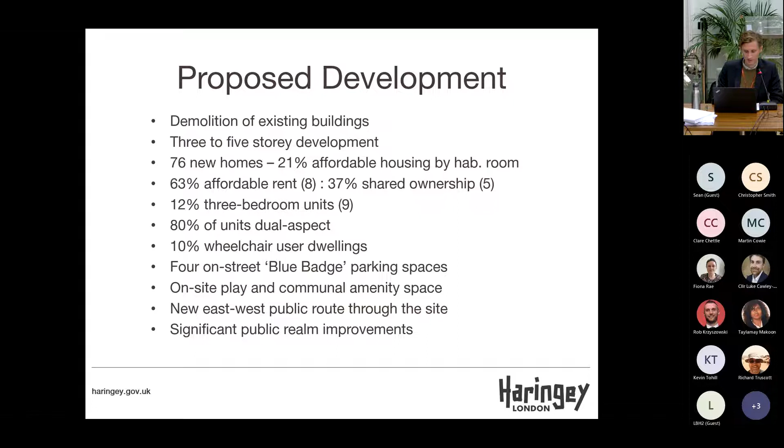There are 12% 3-bedroom units, 9 of the total. 80% of the units would be dual aspect, and 10% will be wheelchair user dwellings. There are 4 on-street blue badge parking spaces, on-site play and communal amenity space, a new east-west public route through the site, and significant public realm improvements.

The site is an angular plot of land located between the Roundway to the west and Church Lane to the east. It is a mostly vacant and derelict site that has been a visual blight in the local area for a long period of time.

The site has a fragmented land ownership, which increases the complexity of land assembly. The image on screen, with the coloured land parcels, shows this fragmented ownership. It is mostly surrounded by low-rise, non-residential properties, and residential properties in the wider area are generally 2 or 3 storeys in height. The area has a complex heritage context, described further on the next slide.

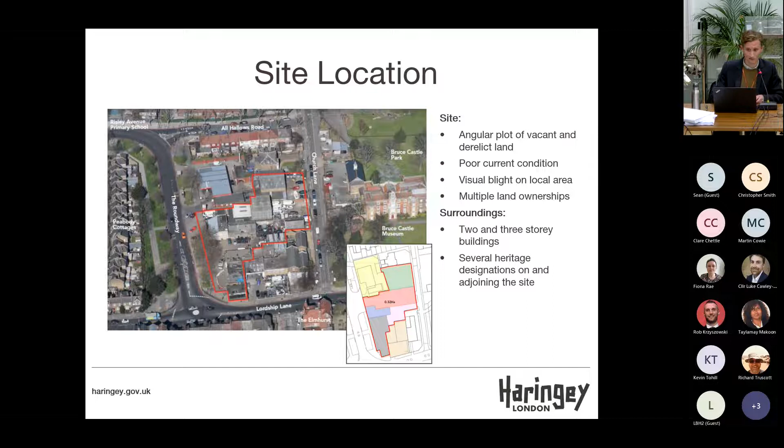An indicative master plan, shown in the inset image, has been submitted with the application, showing how the development will be incorporated into a comprehensive redevelopment proposal for the whole of site allocation SA63 in the future. As such, this development complies with the master planning requirements of policy DM55.

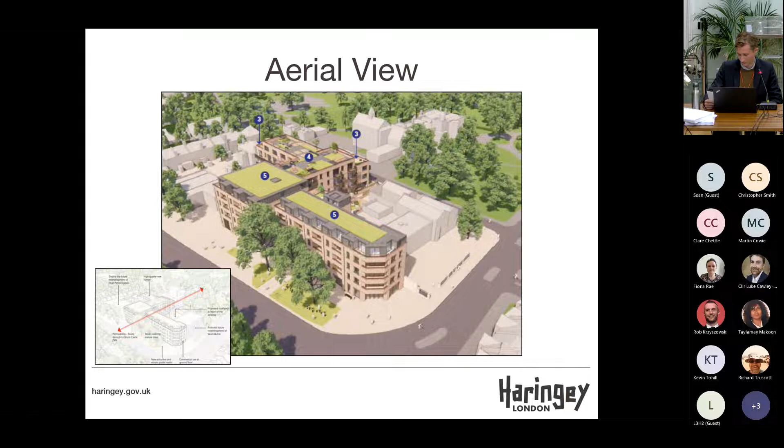The development would mitigate this impact through the use of brick and roof materials similar to those used within this conservation area. Outside of the winter months, any heritage impact would be mitigated further by leaf cover on the existing trees.

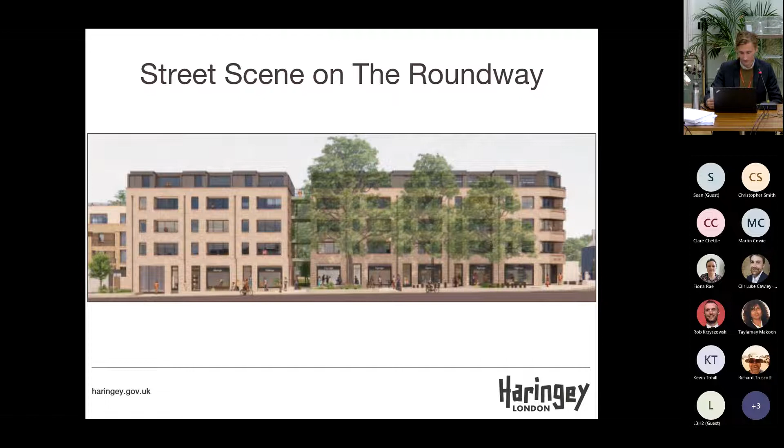This image shows the development street scene from the Roundway. The fire damaged and underutilised buildings and yard spaces would be replaced by a new building featuring elements of detailing influenced by the existing local built heritage.

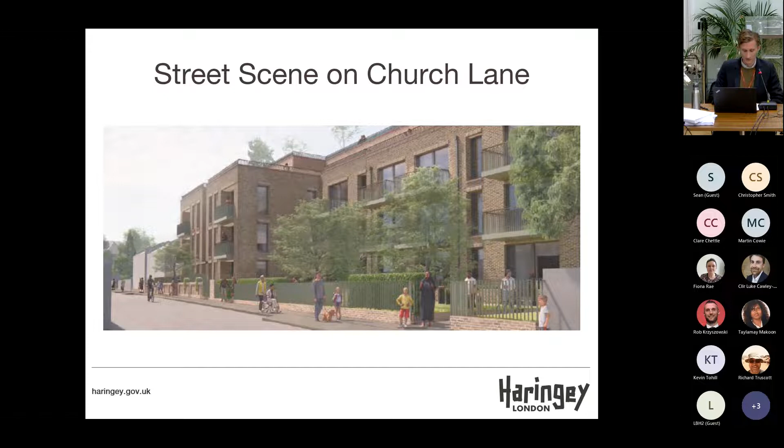The new building would increase natural surveillance over Church Lane and would provide a significantly greener street frontage.

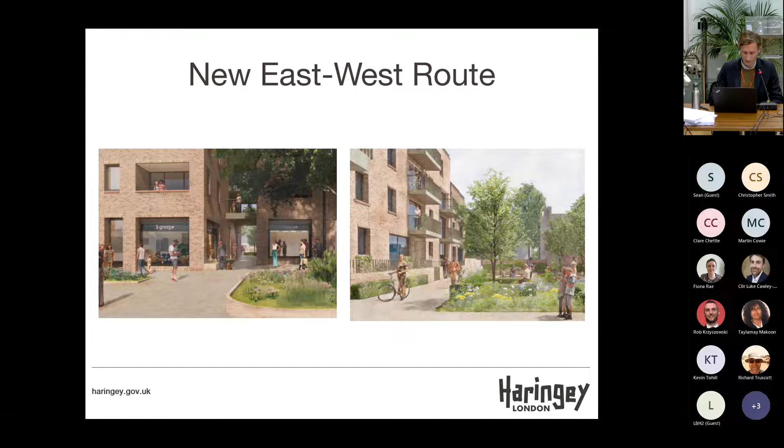This image shows the new east-west route that would connect the Roundway and Church Lane, increasing access to Bruce Castle Museum and Park for local residents.

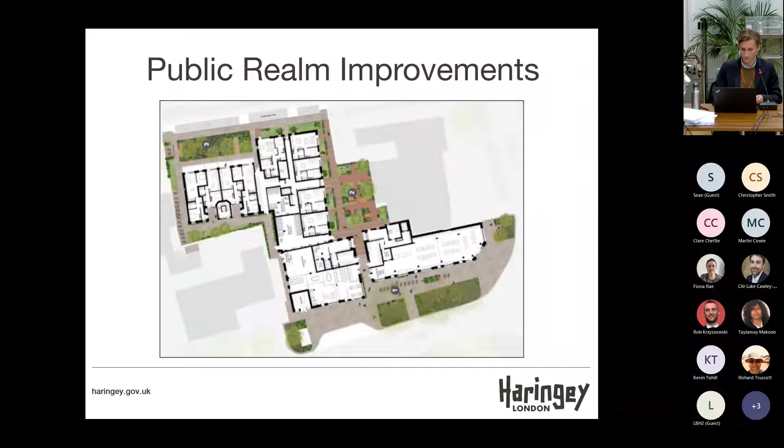The development would provide a significant uplift in urban greening compared to the existing site. It would include several planted communal amenity areas, which would be accessible for all residents. The car parking for the development would be provided on Church Lane. The development would not negatively impact local cycle infrastructure.

So to summarise, this development proposal provides a mixed-use residential and commercial redevelopment on the site, which is in accordance with site allocation SA63. It provides Class E retail and F1 non-residential institution uses, which provide improved employment space and an uplift in jobs.

There's a high-quality design with the quality review panel stating that there was much to admire in the proposed design, including the scale and massing and the brick materiality of the scheme, and also that careful thought has been given to the landscape design.

The design has evolved further since the panel's comments, and there is support for the scheme from the council's design officer.

In terms of heritage impact, the scale and height has been minimised through pre-application discussions. No objections have been received from Historic England.

The Conservation Officer finds a moderate level of less than substantial harm to the significance of local heritage assets. Paragraph 202 of the NPPF states that where there is less than substantial harm, this should be weighed against the public benefits of the proposal.

The development will provide substantial public benefits, including new housing and affordable housing, renewed employment space, a new route through the site, and optimised development on a vacant and derelict site. As such, the development is acceptable and balanced in terms of its heritage impact.

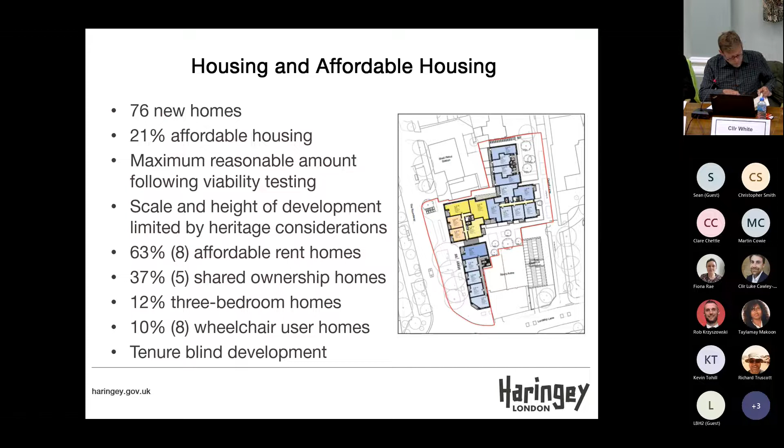Okay, Councillor White, okay, you've got a second question which was on highway safety. Do you want to ask that one? Yes, thank you. So in the original report that was circulated to us last week, the transportation officer submitted an objection on a number of grounds, one of which was detrimental impact on cycling infrastructure, and it talks of serious highway safety issues caused to cyclists.

Now we've got the addendum today where the transportation officer still objects on other grounds, but on the danger posed to cyclists, it now states there is a neutral effect on the cycle and pedestrian facility, which seems quite a significant change from what appeared in the original report. I'd like some clarification on why there's been a change from what seems to be a claim of significant detrimental impact to cyclists to a neutral effect. How has that change in opinion come about, please?

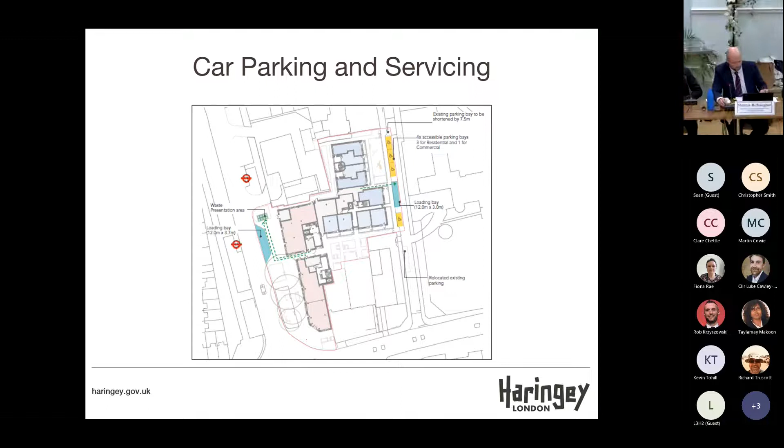Chair, if I may, at this point it'd be good to bring in Maurice from the transport team just to explain the further information he's received since the publication of the report that's led him to that change in conclusion.

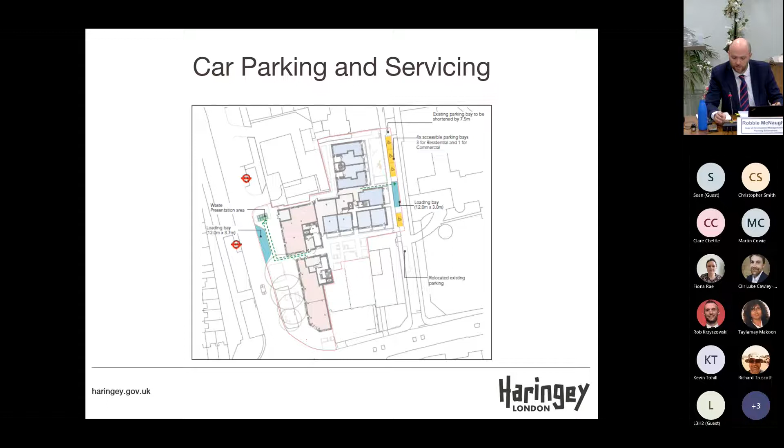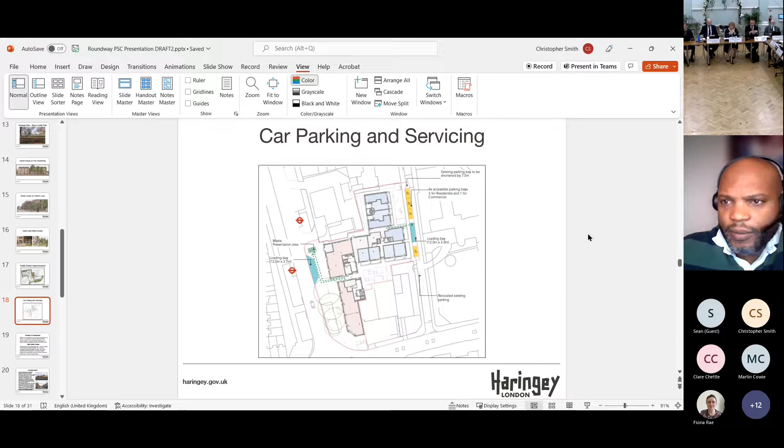Good afternoon, Chair. Maurice Richards, Transport Planning Team Manager. Councillor, and Chair, it's fair to say that we still need a detailed scheme to be designed up and a stage 1 and stage 2 road safety audit undertaken as part of the Section 278 agreement.

What the applicant has done since we provided those comments, they've gone away and looked at the scheme and the design of the scheme in line with LTN 1/20 and the London Cycle Design Standard, and proposed a few changes. We're comfortable that now it's a neutral impact, in that there is a residual carriageway similar to what exists on site.

However, we'll be looking, as part of the Section 278 agreement which is attached as an obligation to this application, to look at an enhancement rather than a neutral effect. But currently, as it stands, I can confirm it's neutral, and we'll look as part of the 278 to see how we can enhance the existing facility.

Thank you, Maurice. So, Councillor Over. Thank you, Chair. I've got four points to raise, I'll be as brief as possible. Points of clarification, just questions that I need to ask the officers.

The first one's on the impact of heritage assets. At page 127, under site requirement point 4, it states a development on the site should enhance the setting of Bruce Castle. However, under the Conservation Officer's comments at page 191, it is noted there will be an impact on the nearby heritage assets, with wording such as visually intrusive and overbearing developments, and that it misses the opportunity to enhance the area. So how will this development meet this site requirement of enhancing heritage assets when it will have an impact? That's the first question.

I'm David Lee, Major Projects Project Manager for this scheme. I'm Trevor Halls, Director of Architecture at Ingleton Wood, a multidisciplinary design company. And I'm Emily Snelling, Supported Accommodation Development Lead for Haringey.

So, get a full page. There you go.

Okay, so Tanya has given you a brief explanation of this scheme. We've been working together with Haringey and the Planning Department for probably over 9 or 10 months now to get this scheme to the stage that it's at. You can ask Emily various questions about the co-design steering group and the reasons behind the scheme, so I'll brush over those.

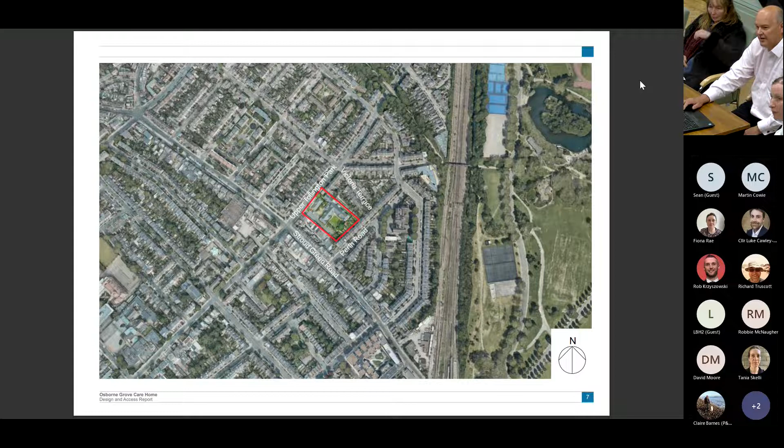Tanya's described where the site is. It fronts onto Upper Tollington Park, which is a secondary road off of Stroud Green Road Junction. Stroud Green Road itself frontage isn't in the conservation area, but the Upper Tollington Park, Victoria Terrace and Perth Road sites are all within the conservation area. So we overlook those 3 frontages.

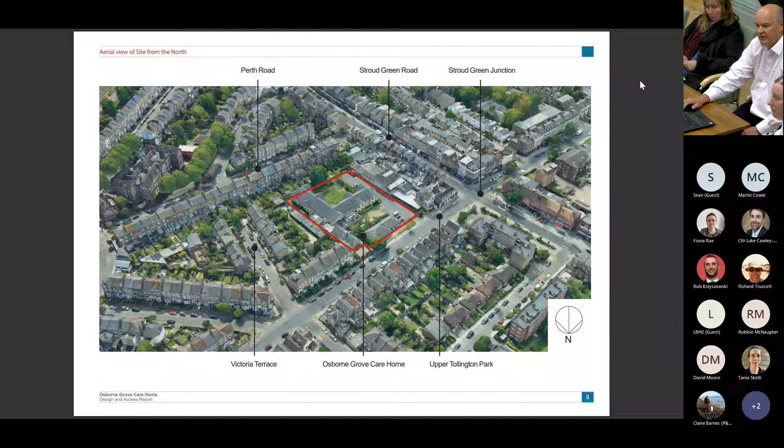You can see some aerial views of the site. There is an existing care home on the site, which you can see. It's a 2-storey development with a very steep pitched roof, and at the front of the site there's a clinic. You can see that from various directions, and that gives various views.

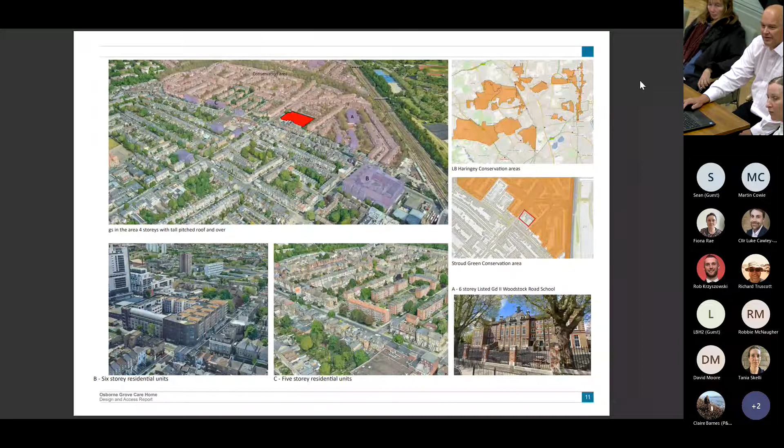I won't go through those now, they're all in the design and access statement that's been prepared. You can see the conservation area in pink at the top of the aerial view, with the site highlighted in red.

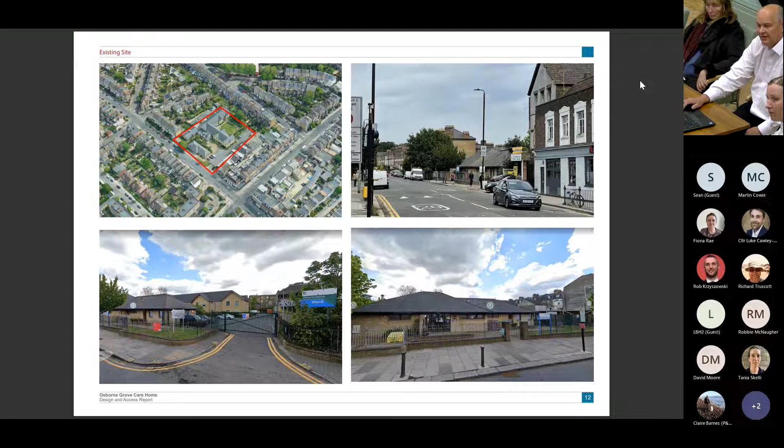This has got various views into the site. The existing site has an entrance at the Stroud Green Road end of the site, and you'll see in the scheme that we've maintained that entrance through there.

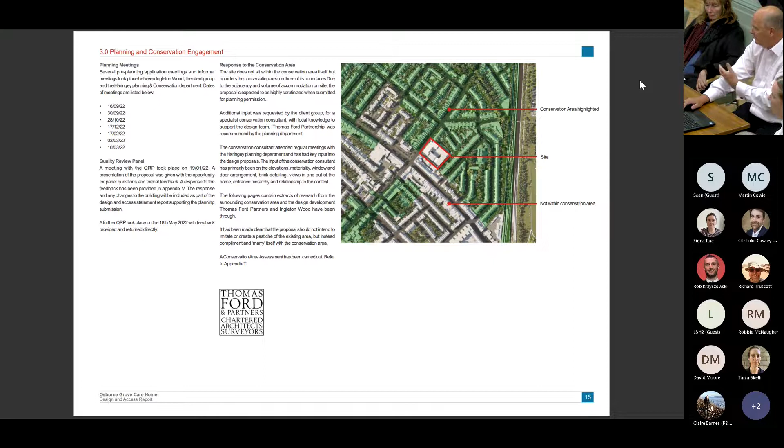These are all surrounding conservation areas. We've consulted with the planning department and the conservation officer at length throughout this process. We've probably had up to 15 to 20 pre-application discussions. As Tania said, it's been to a QRP panel twice, and we've got the feedback from all of those. We have a heritage and conservation architect in our team as part of that, and there's been ongoing discussions between everybody, and you'll see that reflected in the quality of the design.

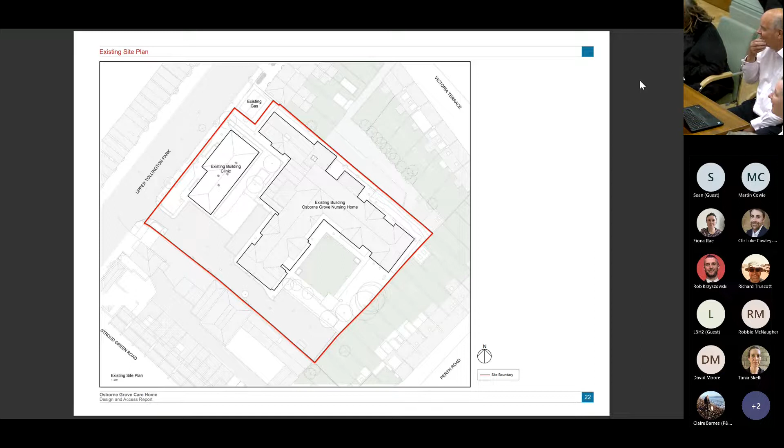Okay, we're back. So can you remember what you... I think so, yeah. Okay, that gave you a brief history of the consultation and all the stakeholder engagement that we've been through on the project. It's been quite intense.

I'll just run through the scheme now. This is the existing site plan. You can see the care home itself and the clinic at the front. It's important to note that at the top of the site there is a gas governor, right on the north corner.

That gas governor is owned by Cadent. It doesn't impact on the site at all. It doesn't feed gas to the site, but it does look after the rest of the district. We would have liked to have lost it off the site so we could have continued the terrace all the way along, but unfortunately that's had to be contained, and we've tried to incorporate it within the design as much as possible.

You'll see that the main entrance into the site, a vehicle entrance through to the parking and delivery access, is to the west part of the site, facing onto Upper Tollington Park, and the entrance to the existing care home is through a gateway at this end, and it comes through.

You'll see on the site also that there are 3 trees at the back of the site here on the boundary line. They are category 3 sycamore trees. They really are not good quality and in need of a lot of maintenance.

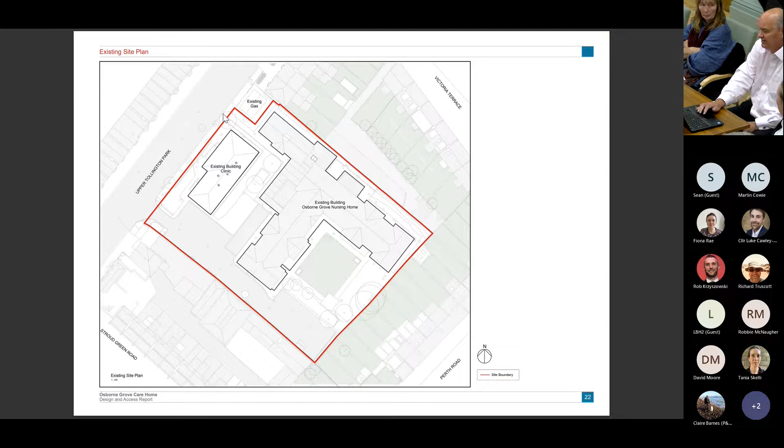We are proposing to remove those trees. The rest on the site are ornamental trees, so we're quite easily removing those. The one tree on the frontage of the site is a maple tree. It's a category 2 tree, but it's right on the boundary, and it's currently impacting the pavement and the boundary walls. On our future scheme, it actually impacts right on the main entrance of the scheme. So our proposal has been to remove these trees and plant a lot more to mitigate that.

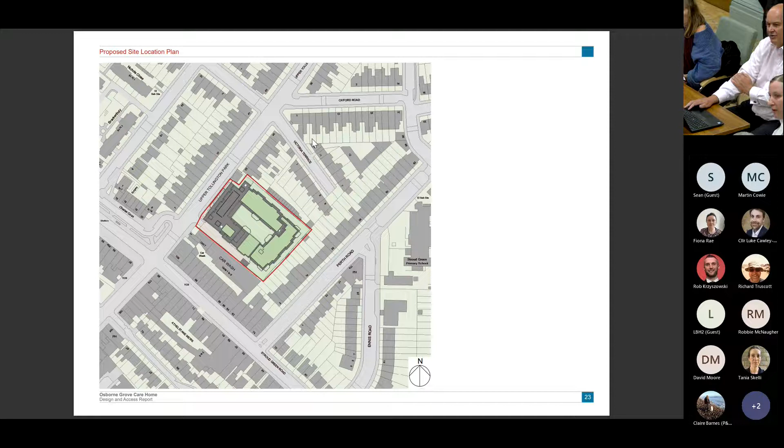This is a site location plan, so you can see how the new care home fits into the site, with that north corner wrapping around the gas governor.

I'll zoom in on that site plan. You can see the proposal is to maintain the vehicular access at this end, and the new trees all around the edges of the site. It's, let's call it, a donut-shaped building with a central courtyard, and that is for the safety, security, and dignity of the residents of the home, to enable them to get outside.

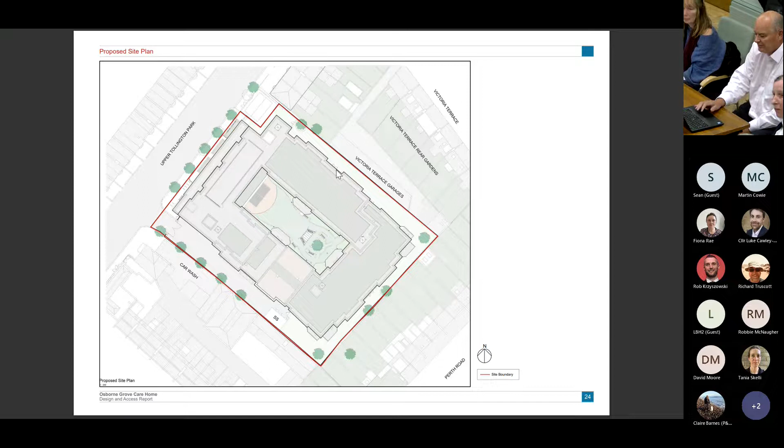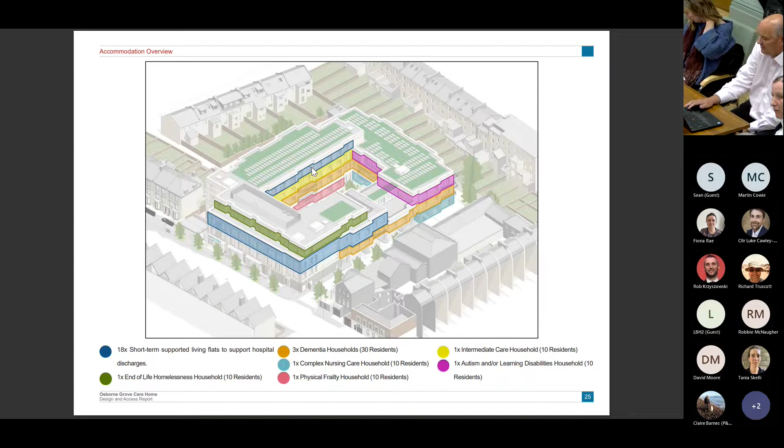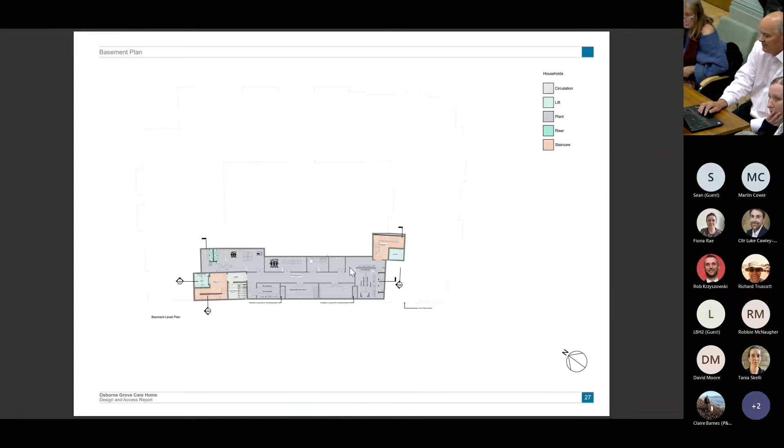There are ground source heat pumps all in the courtyard area, and they access into the back of that plant area. Above that, on the first floor, there are 3 households. I'll explain the households later. This is very much the servicing area.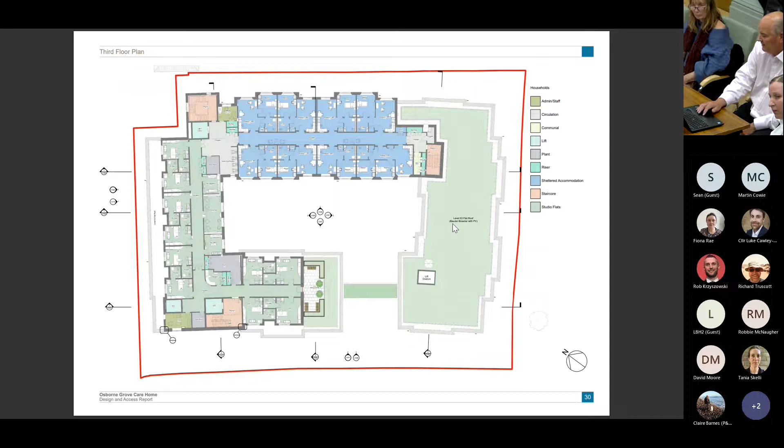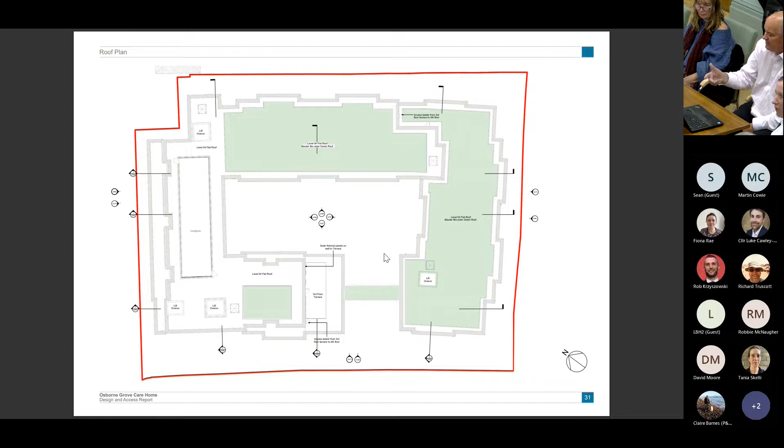That's the 3-storey element along the back, with roof space around there, more sheltered housing, and then these are the end-of-life homeless flats. They've got their own lift and entrance from the ground floor, so they can access their floor separately on an individual basis. Each of the roofs are bio-solar roofs, so it's green roofs throughout with PVs on top as well, giving us biodiversity, rain attenuation on the roof, and power generation.

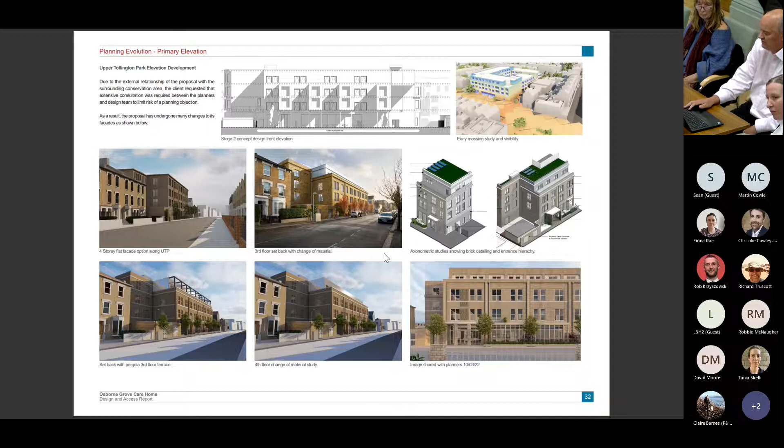We've been through many iterations on how the elevational treatment of this would complement the conservation area, and you can see we had a 4-storey frontage. We've been through all sorts of different methods, worked very closely with Elisabetta, and now we have a 3-storey solution to the front with a setback roof. It's all brickwork, and it's all intended to be off-site construction.

It's been exquisitely detailed, if you like, in consultation, with pilasters and dentil courses, and window proportions all worked out, with brickwork detailing and soldier courses going around the building, carrying on all the way around. You can see the gas governor at the front here.

That has been dressed around in a similar manner to the main building, so that at the moment it's just a close-boarded timber fence around it. It looks a right mess, so we've tried to incorporate that into the design.

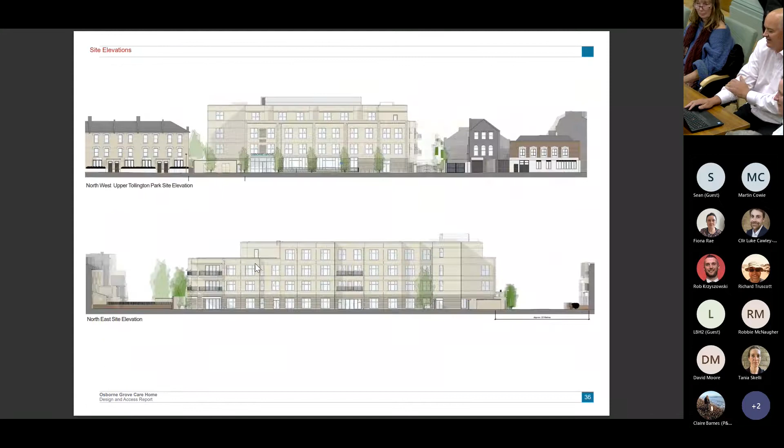I can emphasise the details. You've got elevational plans and elevations, interior quality. I was going to explain the households as well, because it's intrinsic to the design how these households work, the supervision and surveillance of the residents, and they don't have to move more than 8 metres to get from their bedroom door into that central area. That's key to the design, and I was going to go through all the elements of how it's got to that.

Sustainability is the most important part to just finalise on: off-site construction, detail in the fabric, high insulation, ground source heat pumps, air source heat pumps, and PV. We'd like to get to a zero carbon solution and would love to have achieved that, but this building has to be maintained at 25 degrees, 365 days of the year, so we are using the thermal mass of the building to control that temperature. We are 69% above building regs requirements at this present time, so it's done its best to get as far as we can push it, given the amount of roof space we've got to put PVs on and that sort of thing.

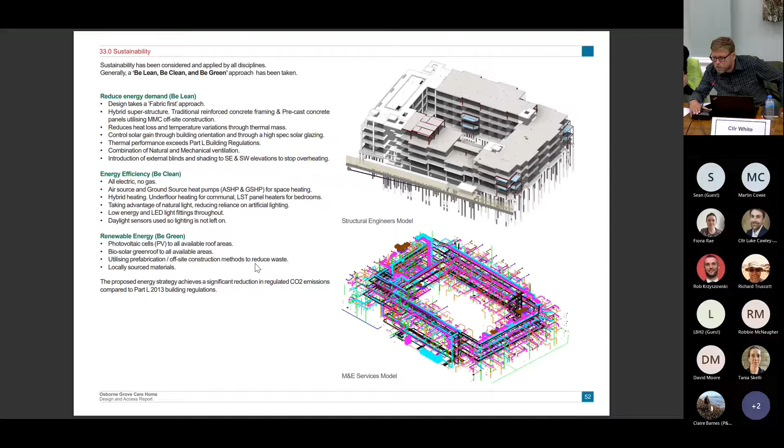Councillor White, go on. Yeah, thanks. Mine was just very quick. You didn't have time to tell us about the household situation, so maybe you could tell us a little bit about that now.

Go on, Clive. So essentially we've created the home around a lot of studies into good quality care homes. We've looked at the sizes of different households, and the optimum number is between 8 and 12 beds per household. So we've got 10, right in the middle of that number.

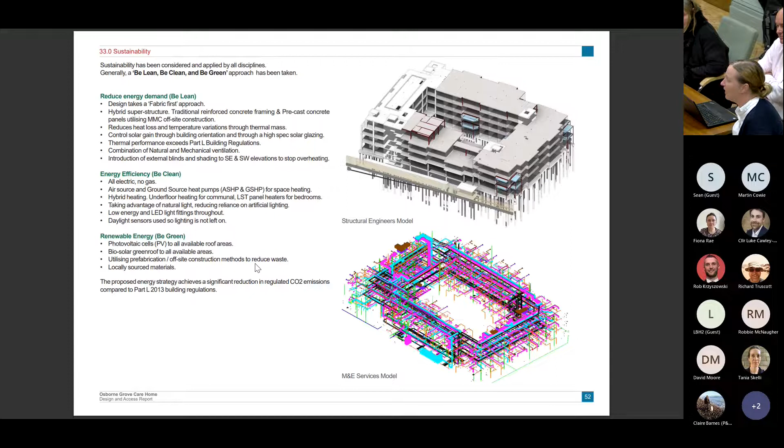What we've done, if Trevor can bring it up, is we've sited the communal facilities, so lounges and dining rooms, at the centre of those households, which means that if you're in one of the bedrooms furthest away from those communal areas, they are actually only 8 metres away. So if you're fairly mobile, not in a wheelchair, it actually encourages independence and movement if the areas you have to walk are fairly short.

You can't really see it well in these images, but the angles of the corridors are splayed, which improves vision for nursing staff. This nursing pod is located right in that central area, and nurses will have lines of sight all the way down. In terms of reducing the risk of falls when people come out of their bedrooms at night disorientated, we're really trying to minimise those safeguarding risks.

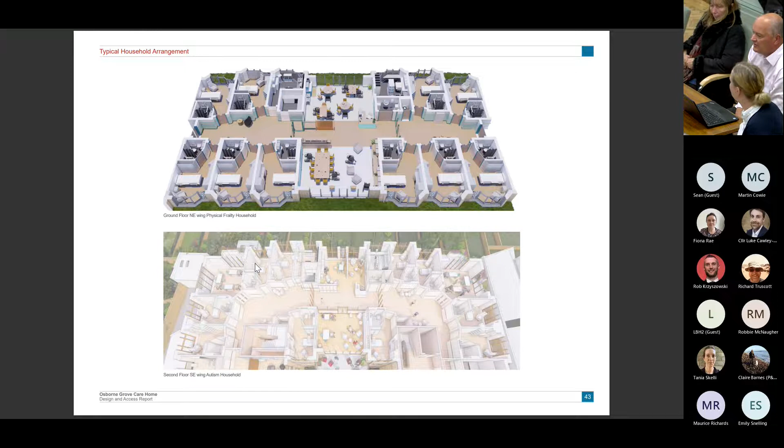They also call it passive design, in terms of dementia-friendly design. Generally, if you're somebody with dementia, you'll come out of your bedroom and head towards the bits of the corridor where it goes wider, because that gives the sense you're heading somewhere important. On the dementia side, we've collaborated closely with the University of Stirling in their DSDC unit, who will audit this scheme, but have already audited the design in advance and have been very supportive and accepting of it. So that's very positive for us.

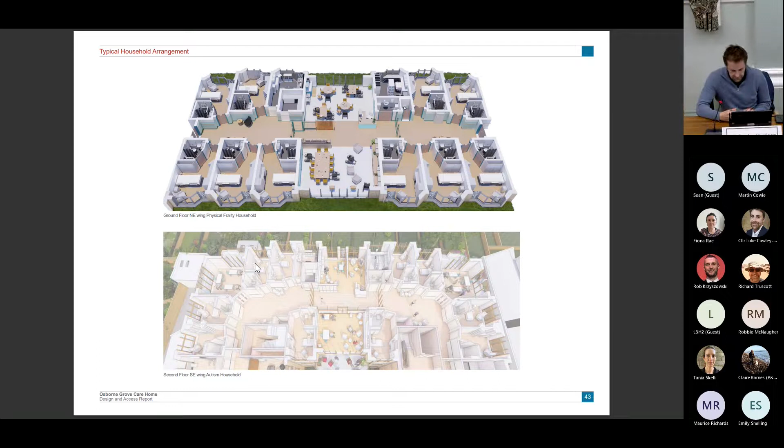Thank you. Councillor Cawley-Harrison. Thanks, Chair. Four points. First, on the design, I do find it a bit flat, I have to say, but at the same time quite imposing. It's so close to the pavement, it's ahead of the line of all the terraces. So I'm wondering why you haven't continued that line rather than bringing it forward and making it so imposing, because it's a big building width-wise, and why you haven't introduced the simplicity of the other buildings on the street.

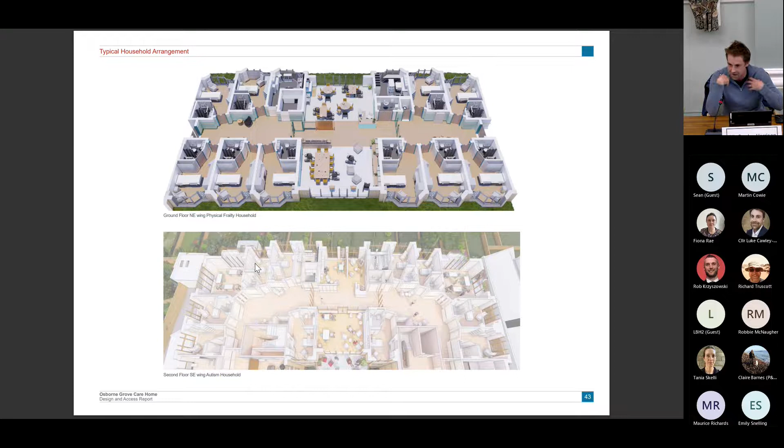Simplicity, but obviously the beautiful design of them as well, and the contrast and all that sort of thing. It feels like, I know you talked about detailing, but for me it feels flat, and a lot of that is missing. Perhaps a more blended design might feel a little bit less oppressive.

That's point one. Second, I don't know a lot about these sorts of facilities, but there's obviously a real mix of different needs going into this one building. Is that commonplace? Is there a conflict at all? Would that be fairly normal?

Third point, it feels like there's going to be quite a lot of residents. I can't remember the exact number. Is the courtyard space in the middle for all of them, and what sense of space can they each expect? Will there be times they're allowed out, or can anyone go out at any point?

And then the fourth point, Osborne Grove isn't that old. The current site isn't that old, but you said it's at end of life, which is concerning. I guess you mean end of life for the use of today. How do we know this is being future-proofed? Because I'm sure when Osborne Grove went in, they thought this was a long-term solution. So perhaps a little background on that would be useful.

Thanks. I can refer you to the Cabinet decision in 2019, which goes into a lot of detail about why we wouldn't keep the existing building. Primarily, the building was never designed to be a nursing home. It was designed to be a residential respite facility for people with dementia, so it was only ever meant for short-term stays. There's a lot of fundamentals in the building that just aren't quite right.

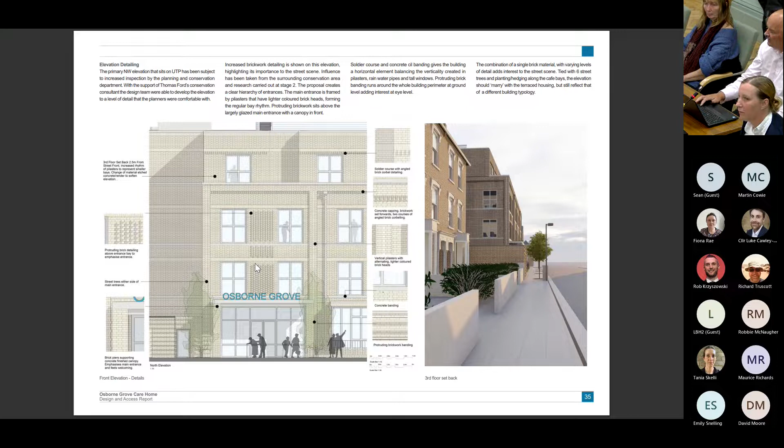Okay, thank you. You can see the proportions - they very much match the rhythm of the street scene. So the bays, the 8-meter bays, are typical of the width of a terraced house down the street scene as well.

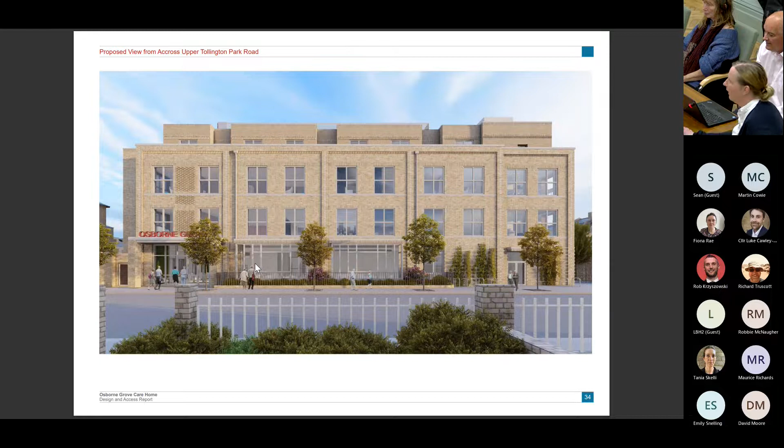Okay, and there's outside space and resident mix. So in terms of resident mix, generally most care homes we're using are in the private sector, so they have to maximise bed spaces, which we will be aiming to do. But within this provision we've tried to ensure we've got provision for placements we're unable to make. Where we've talked about specific dementias, at the moment we're placing residents as far afield as Croydon for specialist dementia - not your Alzheimer's but Korsakoff syndromes and more complex dementias. It may be that over time you get more of a blend of people, but it's about protecting for different user groups.

We've specifically designed a household for people with learning disabilities, and that was one of the key defining features. There isn't provision in London, and we've got an ageing population of people with learning disabilities, especially in Haringey, where people are living longer. They have more complex health conditions at end of life, but also their parents pass away or become more elderly and infirm. So where they probably would have previously cared for individuals at home, it's not always possible now. At the moment we have a number of people in nursing home placements, but they're not specialists, and what we want to do is create something really innovative and different.

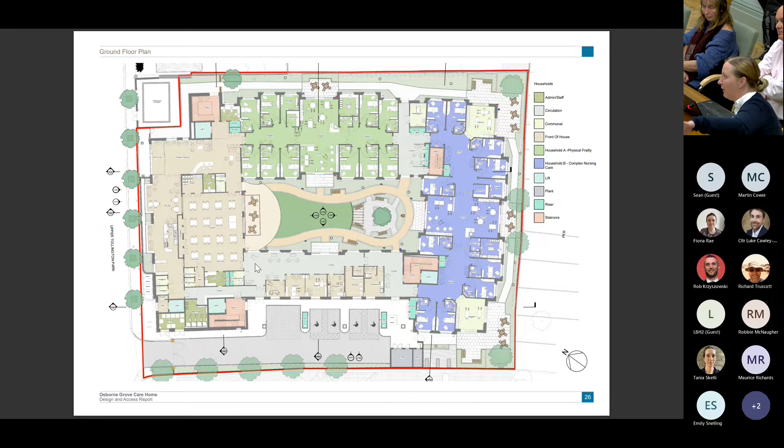Okay, and then the outside space quickly. So the outside space will be open to all residents, bar those in the homelessness unit who will have their own space, but they're more likely to be mobile and leaving the home. Within the home we've got lots of different areas - the main courtyard area, but on the peripherals of the building there are some really nice little quiet zones, both for residents and staff, because sometimes staff need a break and need to sit somewhere quiet. So we've been conscious about having a mixture of both courtyard space, which has community and exercise functions, and quiet spaces where people can be peaceful and reflect - on the ground and lower levels, and on the upper levels we've got small courtyards as well. Thank you very much.